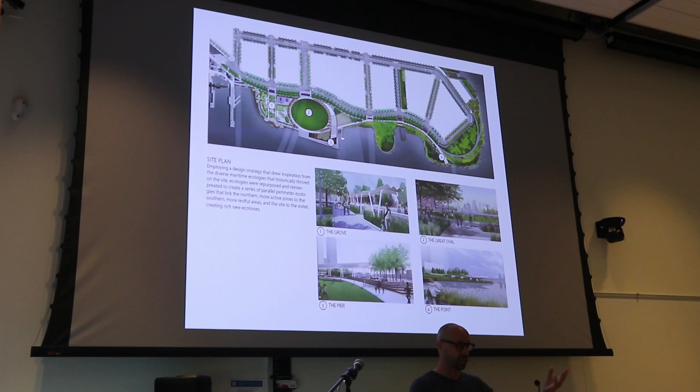Moving to the design concept of this site — it's been published 20 times over and received 50 international awards. The project is all about connection. As I mentioned, my work and the work of the teams I've been involved with has always been about connection — between landscape and the river in this case, and the communities and the park, but also about how to provide active and passive recreation, and how to connect hydrological systems with building systems, site hydrological systems with building systems, that sort of thing. These diagrams describe those kinds of connections a little bit.

Many sites accrue different levels of complexity, and this project is probably one of the more complex I've ever worked on. This diagram explains that on the northern end of the site, we were building on top of the Queens Midtown Tunnel and the most major electric transmission line that basically powers all of East Midtown Manhattan, as well as the 7 train tunnels and the Long Island Railroad tunnels — incredibly complex infrastructure. But it was also a site prone to flooding, so we were layering infrastructure on top of this.

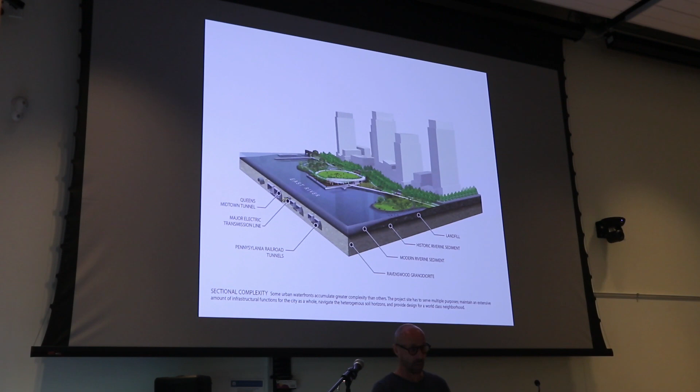On the southern end of the site, we were creating tidal wetlands, reworking the fabric in this area. There was responsiveness in how we wanted to engage the site and the dynamic nature of the tidal strait itself in terms of flooding. The East River has a tidal prism between high and low tide of about 4.5 to 5 feet every day. And then with Superstorm Sandy and events like that...

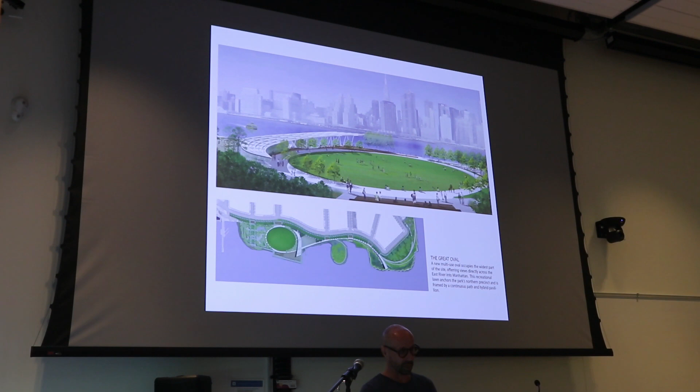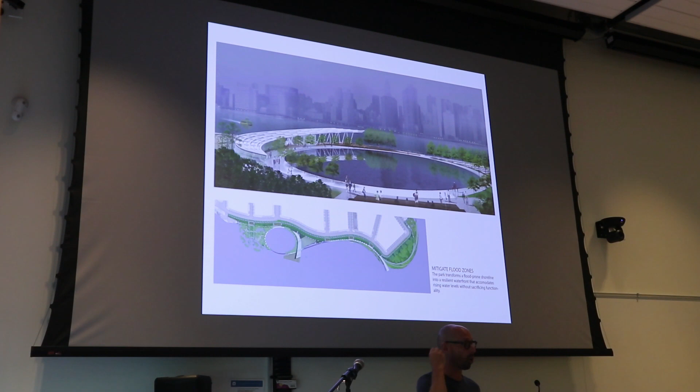Many of the parks washed out and are prone to that sort of aggressive episodic flooding. We designed this site with all of those things in mind, and it's actually one of the few sites that survived Superstorm Sandy with very little damage. The city used it as their emblem for what they were trying to achieve in their new waterfront edge design guideline program.

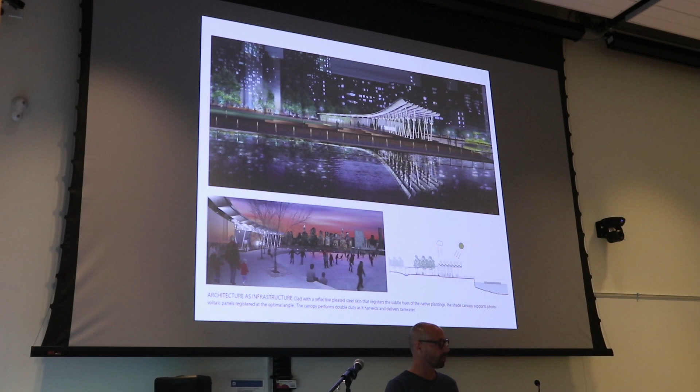But again, it's about connections. Here's a pavilion where we caught stormwater and pushed it into biofiltration swales, producing enough power through photovoltaics to power the entire park. And then, rather than flattening the site, we leveraged its topographic nature — as you can see on the lower right, it's a fill site used to create these promontories and eco-exploratory public natures, if you will.

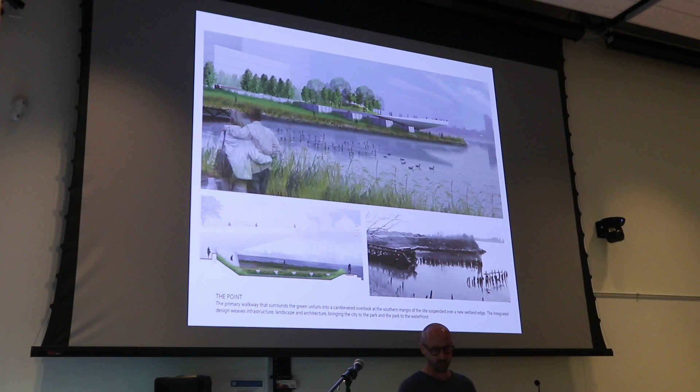Here's the final concept vision, and here's the constructed site — I'm sure you've seen this in publications. Here's a rain garden I designed and reinterpreted, and here are the wetlands. That little walkway on the edge is a breakwater to control a lot of the fetch.

The East River is fast moving, and the fetch of the wind-driven waves would just scour out a wetland. So we had to create a pervious breakwater, a promontory, so that you could take in the multiple boroughs — it's right at the nexus of Queens, Brooklyn, and Manhattan. There's an island that emerges twice a day when the wetland between the island and the upland floods.

Urban beach, and then these kind of aggregate social spaces along this pervious breakwater. The reason I'm showing you this project isn't about the pretty pictures. I'm just trying to give you a concept of what's happening here.

What really drove me insane about this was that the regulatory policy framework we were working in required us to meet certain obligations in terms of stormwater management, energy, et cetera. But it assumed that all of those standards would need to be met on day one. So if you were designing a 2-inch storm system, on day one it needed to be meeting those obligations.

So basically all of this nature-based infrastructure in the current United States has to be over-designed. By year 3, by year 5, these projects are doing 3 times, 5 times, sometimes 10 times more, delivering 10 times more environmental benefits than what would be required under a regulatory framework.

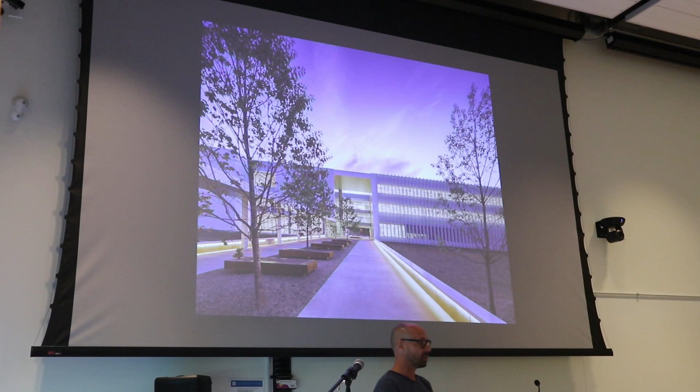Here's a project, 1,500 acres in Blackstone, Virginia, for the Department of State. This is a diplomatic security training complex. This is like where you would pull up in the middle of a forest, a national forest, and get to a gate, and you would think you would see Tom Cruise with a retinal scan. It's a very intense project—1,500 acres, drive tracks, smoke houses, rappel towers.

Here's a Class A office building. The United States trains other diplomatic security organizations from our allies from around the world. So if you're in England and you're the equivalent of diplomatic security, or Germany or France or Spain or Italy, you come here and do your training because the Americans build the craziest stuff out there. So here's an academic building. Here's a firing range. Going to Lower Manhattan, here's the redevelopment of 26 Federal Plaza landscape.

This is on a federal building in Lower Manhattan. When this project was originally envisioned, Richard Serra did the Tilted Arc across the project site maybe 40 years ago, and it was kind of unloved and widely despised by people in the building and in Lower Manhattan. Well, Lower Manhattan has changed a lot. Now it's got 3 times the volume of families and kids that it did even 10, 15 years ago. So re-envisioning this project required thinking a little bit differently about what a federal site in a really tight urban area would be.

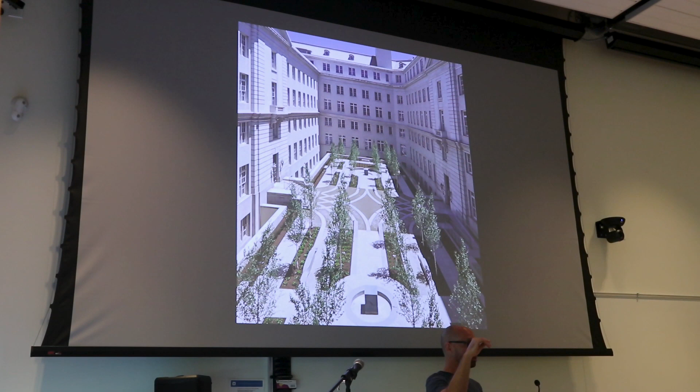This is a quick, interesting project. All of these projects, by the way, are LEED certified, site certified, all of that litany of stuff. But still, I'm going to speak to where it's falling short, and where the field is falling short, in a minute.

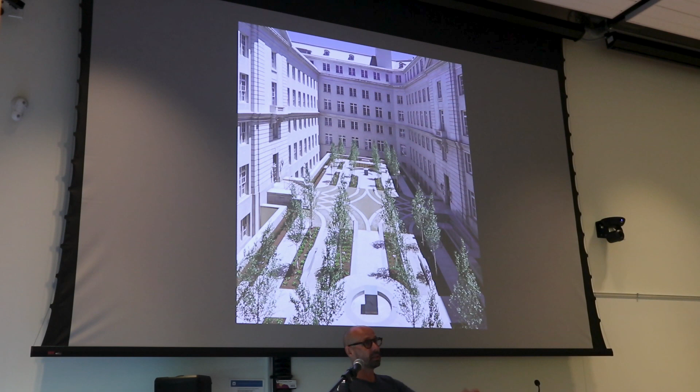This is 50 UNP, 50 United Nations Plaza in San Francisco, a 1930 Beaux-Arts building we redeveloped. It's right on San Francisco City Hall Plaza. We did a parterre garden, and this is directly after it was planted, so it looks a little like a plucked chicken, but I promise it's different now. What's really interesting is it's very formal in plan view, but when you get down on the ground plane, it's very dynamic in terms of its visual and textural quality.

So that just gives you a quick overview of some of the projects that GSA is moving and operating. But this brings me to a project I want to focus on for a second, which is the United States Coast Guard headquarters in Washington, D.C.

I think Chris Ellis maybe spoke here a year or two ago from the University of Maryland. I contracted the Landscape Architecture Foundation at the University of Maryland to basically do a deep dive on this project—like part of their case study investigation, but imagine that times 10, a much bigger set of documents, a much deeper dive.

Washington, D.C., for those of you who don't know, sits basically at the bottom of about a 120, 130-foot vertical bowl. And so all of the capital planning commissions around D.C. are very concerned about the visual impacts from any projects in Washington, D.C.

The U.S. Coast Guard headquarters is a 1.15 million square foot office building, over 11 stories, that basically descends down that topographic bowl hillside. It's the 3rd largest green roof in the world still today, about 12 or 13 acres of green roof, both intensive and extensive. All of these achievements go on and on.

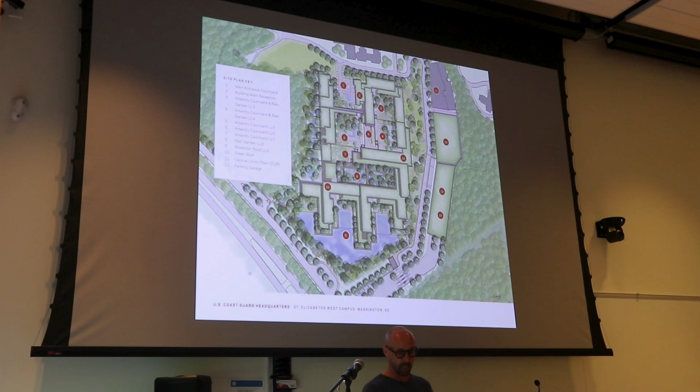But again, this project was all about hydrology, and our concerns were about dewatering this plateau at the top, moving water through the site, and basically cleaning it at the bottom. Our requirement was to treat a 1.7-inch storm, which on this particular site was somewhere in the realm of 250,000 gallons of water. So we had to do that on day one, despite us doing this Herculean piece of green infrastructure.

When we actually went back and looked at this project and started discussing where it had arrived by year 3 and year 5, not only were we processing almost 800,000 to 900,000 gallons of stormwater by year 3, but—to speak to Jack's point—we were retaining all these other co-benefits. We were sequestering almost a million pounds of carbon per year, compared to a speculative office space, which would only be about a tenth of that, about 100,000 pounds of carbon per year.

We're also seeing incredible returns on lower employee absenteeism. We were seeing higher worker productivity—this is Coast Guard itself reporting this—and greater pride. Federal agencies do these employee viewpoint surveys to tap into the morale of their staff. When they co-located in the space, their morale went up like 25 points.

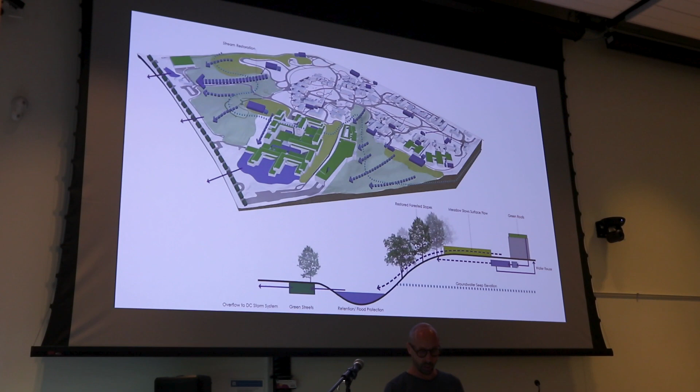I could go on about just the environmental accomplishments with this project, but again, it was emblematic of the policy goals we're trying to hit on year one. We don't have a mechanism for really capturing how nature is growing in and yielding higher performance standards and benefits.

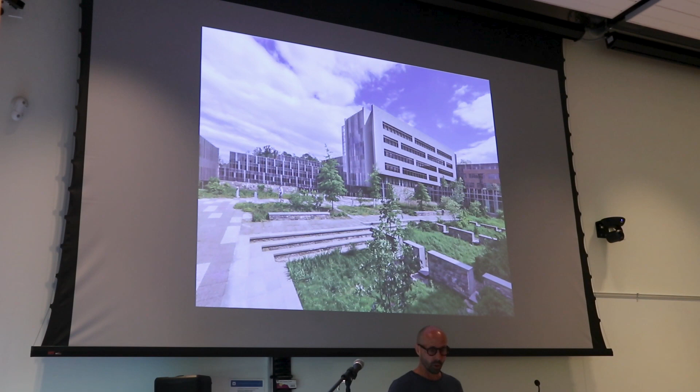Here's a pretty picture—this is captured stormwater. There are very mannered stormwater details like this, with skim fountains and the like. Here's some descending courtyards with water features, all recirculated water. Major green roof areas, huge stormwater catchment areas with weirs and check dams.

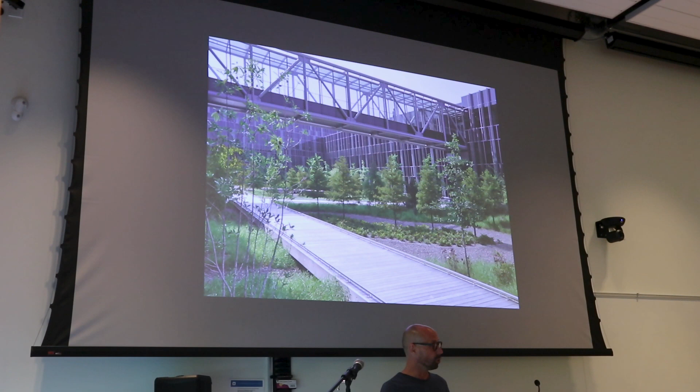There are areas that are just massive, allowed to just be vernal pools. And they are—when you go there, I've seen bald eagles just sitting in trees. Deer will walk right onto the roofs with no sense that they're standing on a piece of architecture. There is a complete meshing of landscape and architecture on this site.

This is the catchment, the metaphorical Chesapeake Bay. At the top, the landscape system is designed to be more like a montane, West Virginian landscape, and it recharges the site.

The next project is the one that probably lit my hair on fire the most, in terms of saying we have to do something about this. Here's a land port of entry in Arizona, the Nogales Land Port of Entry. It's the fourth busiest land port of entry in the United States on the southern border.

As part of the American Recovery and Reinvestment Act, we developed this port. I think Joe Volpe used to say this, or maybe it was Ken Smith—one of the two of them used to say we need to have a good concept here, otherwise this thing's going to turn to dog meat by the end of the process. So every project needs a good concept, otherwise you won't have a North Star for where it's going.

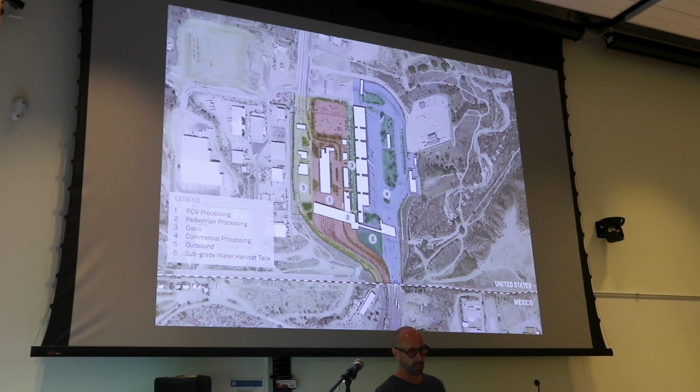This project, I'm going to show you a quick 5-minute video to break up my talking, but the project is all about water, as you can imagine. The result is a much different design expression, both environmentally and visually, texturally. You can see how lush this pedestrian area is versus what I'm about to show you in the video.

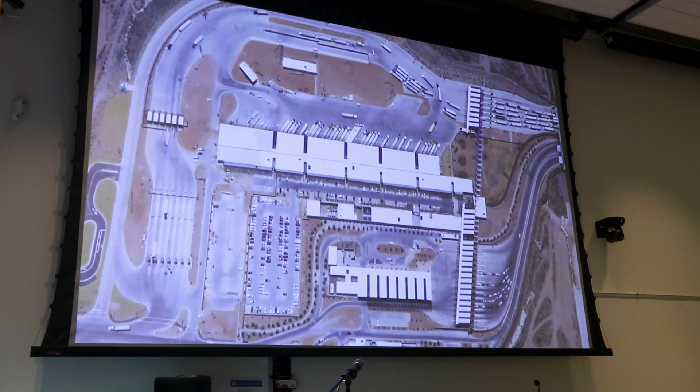An oasis conjures many romantic thoughts: Bedouins lounging by a life-giving pool of water in the middle of the Sahara, Native Americans locating sources of water to irrigate crops newly sown in the Sonoran Desert. An oasis provides a respite from the environment, a dignified and comfortable place for the trade of goods and stories. The new Mariposa Land Port of Entry is this respite. It is also a complex lightning rod of a project, sitting on one of the most contentious borders in the Americas, at the eye of a whirlwind of debate over liberty, migration, and trade.

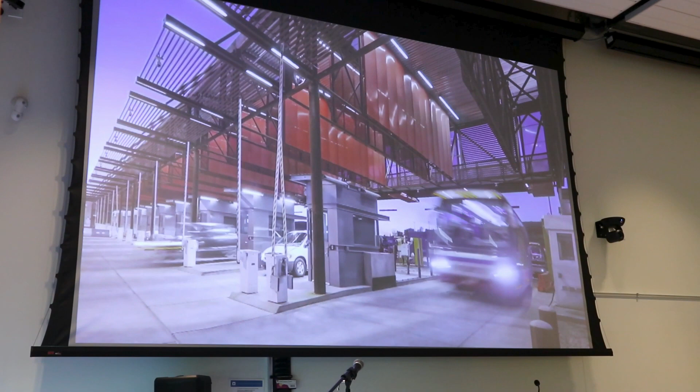Located just west of Nogales in southern Arizona, this 55-acre, 270,000 square foot project strikes an impressive balance between security and a dignified welcome, between efficient operations and a comfortable environment for staff, and achieves sustainability within a harsh and unforgiving desert climate. At a basic level, this region is defined by a geopolitical line on the earth that divides the American dream from human beings in need. Many, in attempts to navigate this line, risk their lives. In his poem Borderlines, Arizona's 2014 Poet Laureate Alberto Rios clearly sees the border as what joins us, not what separates.

Inspired by this clarity of thought, the design of this port of entry aspires to reach out with grace and authenticity to our southern neighbors and say welcome.

Inextricably a product of both the General Services Administration's Design Excellence Program and the American Recovery and Reinvestment Act, this new port of entry demonstrates responsiveness to local traditions and expression of culture, placing great value on a sense of dignity, elegance, and strength.

Designed as a cultural connection rather than a division, the threshold of the new port is an entry pavilion inspired by the waving red, white, and blue flag. Additionally, this major reinvention of the fourth busiest port in the U.S.

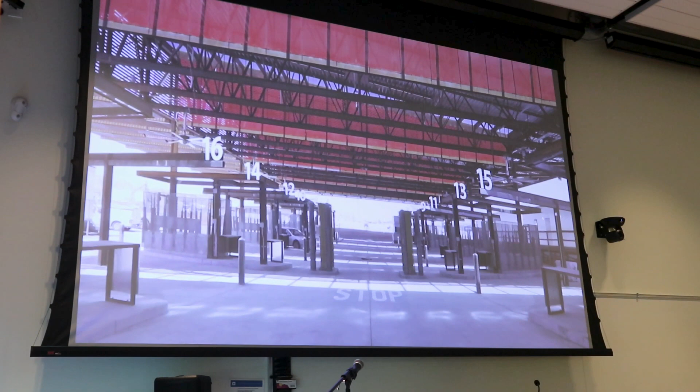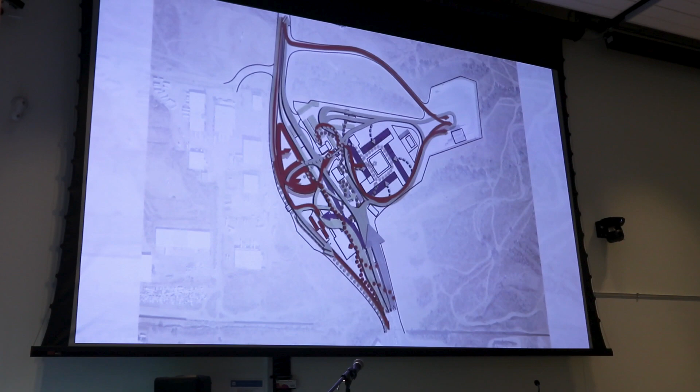and Arizona's largest commercial port is on track for LEED Gold. Traffic flows and internal circulation is a key element to the success of a port. Diagramming the existing operations exposed extreme deficiencies and emphasized that a clear and efficient pattern of movement was critical.

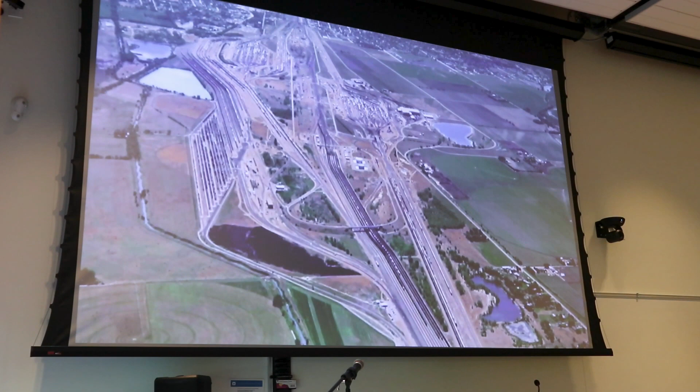The solution to the chaos was found in the clarity of a railroad yard design: smooth, continuous paths, optimized movement. To complement this planning strategy, the idea of a desert oasis, a life-giving source of water in the middle of a harsh climate, was implemented.

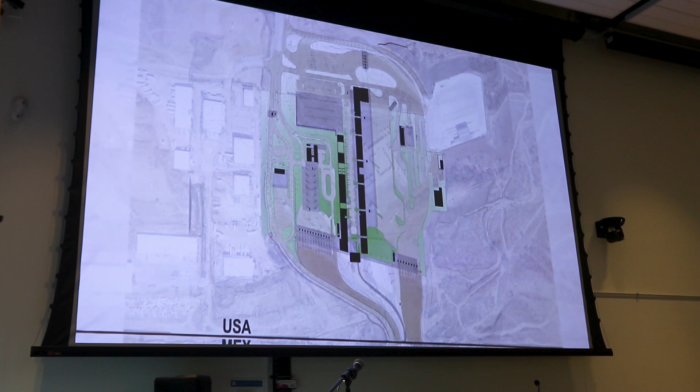Mariposa is designed around the concept of creating an oasis within a bustling vehicle and pedestrian processing station. The intent of this idea is to infuse the human experience, both for visitors and staff, with a connection to nature, and thus some dignity and relief from daily stress.

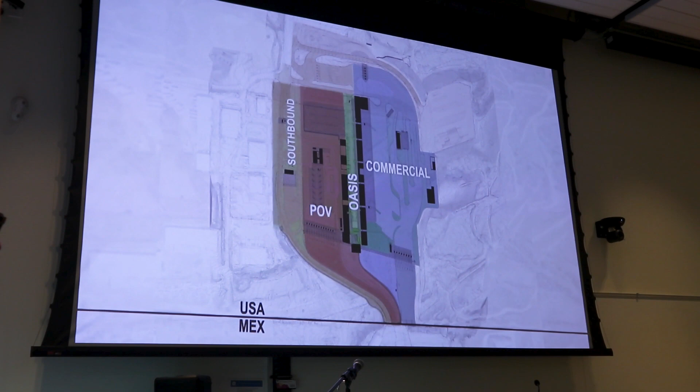The clear zoning of the site emphasizes smooth traffic movement around the centrally located oasis. The vitality of the port comes from its handling of water, a critical element in the desert.

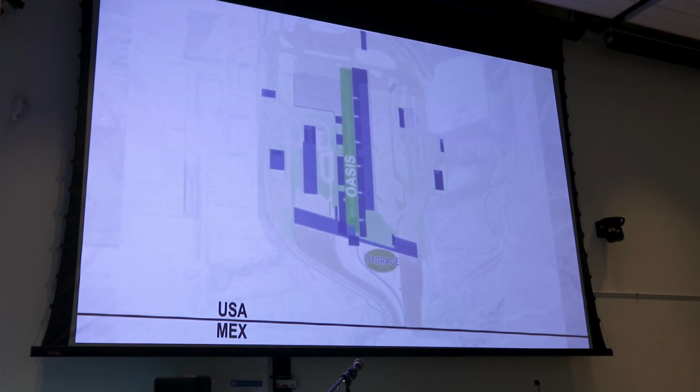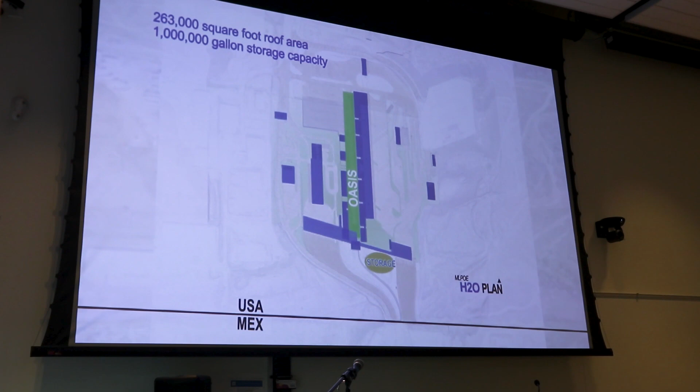Nogales is characterized by massive rainfalls during the monsoon season, paired against many months devoid of precipitation. The pavement and roofs throughout the port's campus are carefully designed to harvest this rainwater. In a typical year, the project will be net zero water for irrigation.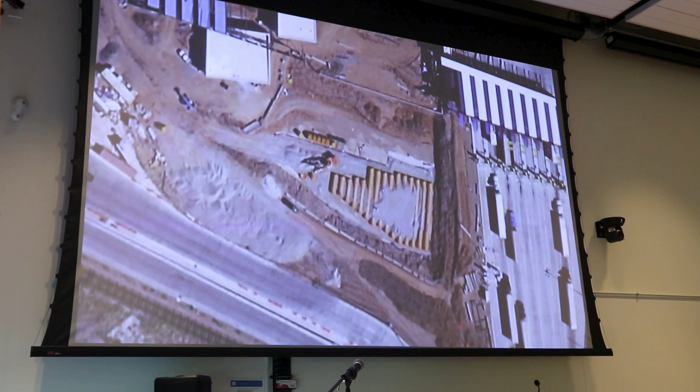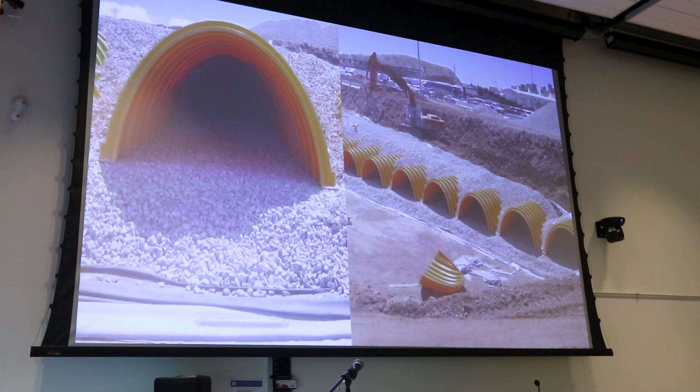From April through June, there is a calculated shortage of 746,000 gallons. To accommodate this shortage, a rainwater harvesting storage system of 1 million gallons was designed to allow for prolonged periods of drought. In August of 2013, monsoon rains maximized the storage capacity in only two weeks.

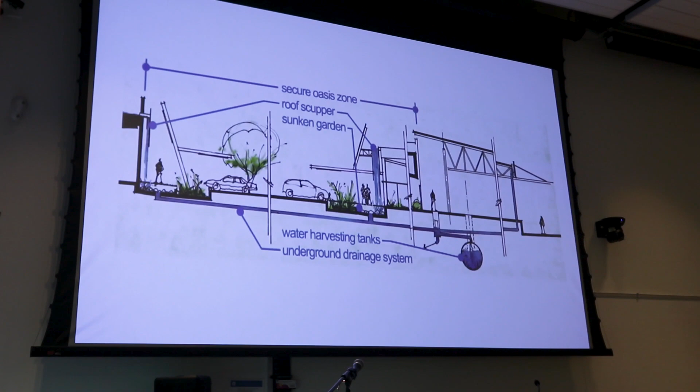The oasis respite and the celebration of rainfall in the desert work in tandem with a clear and secure planning diagram to create a more humane experience.

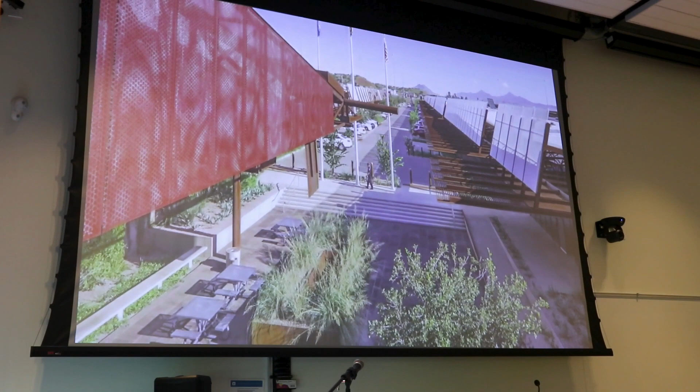The buildings and exterior spaces are designed to enhance the staff's and users' operations through program, flow, natural daylighting, views of nature, thermal comfort, safety, color, and water harvesting.

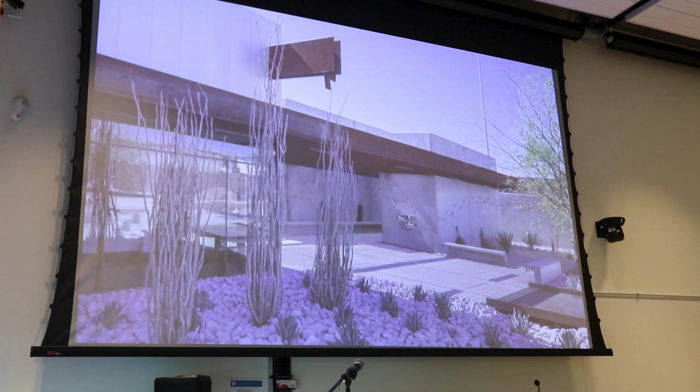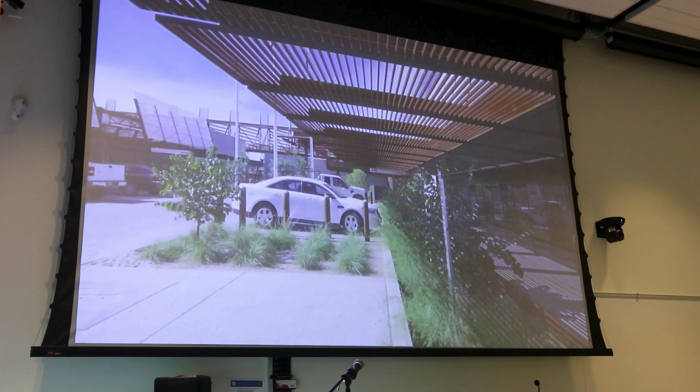Pervious paving, sunken gardens, and sculptural scuppers are integrally designed throughout the site and buildings. Shade trellises and vegetation work together in the oasis to provide a comfortable, safe zone for officers and staff.

Many design iterations of scuppers and catchment devices were studied. Because water is precious in the desert, the scupper and downspout system is an opportunity to celebrate a rain event.

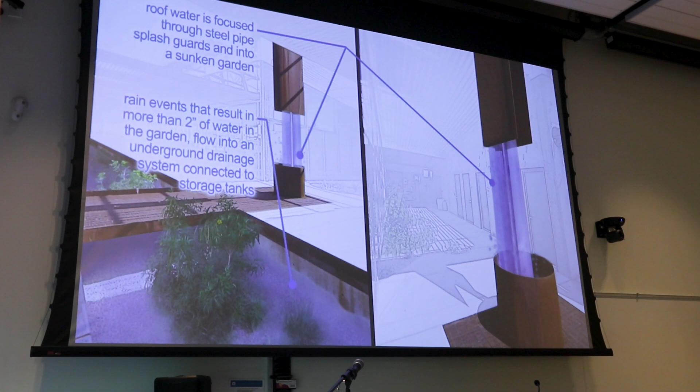Roof water is focused through steel pipe splash guards and into a sunken garden below. When a rain event results in more than 2 inches of water in the garden, it overflows into an underground drainage system, which is connected to the water harvesting storage tanks.

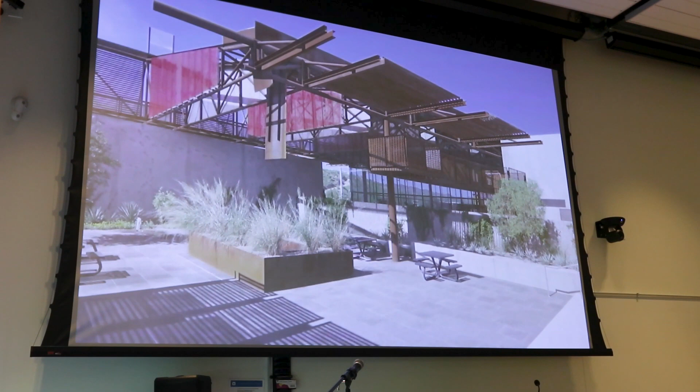The focal point of the oasis is the pedestrian plaza. At the center of the plaza is a dramatic scupper and catchment basin. The crash plate of the scupper focuses all water from the 26,000 square foot canopy roof into the collection basin. This basin connects directly to the underground drainage system and water harvesting storage tanks.

At the Oasis Plaza, a bioremediation fountain helps filter harvested water, while providing an intimate space for private reflection filled with the calm and soothing sounds of water.

The Mariposa Land Port of Entry is a study in transformation. Before, there was a dangerous mix of vehicular and pedestrian traffic arriving in the United States via what is essentially a parking lot. The new arrival experience demonstrates how, through careful planning and thoughtful water harvesting design, a beautiful and vital landscape can be sustained, one that embodies the best aspirations of the United States.

Okay, so we did a deep dive on this project as well, post-construction, and everything you saw in there is largely accurate, except it was constructed with major errors. There were errors with controllers, hydrological controllers bringing chiller water to the site, water into the chillers. There were problems with how this 1 million gallon cistern was constructed. And these are the things that clients don't want to put out there and celebrate, but they're the reality, the gap between prescriptive performance and what is actually happening in the field, right?

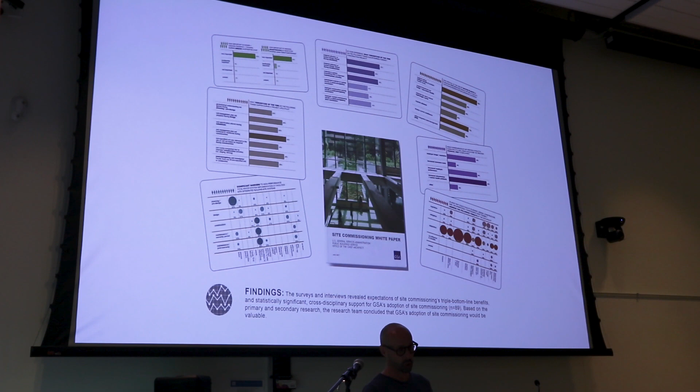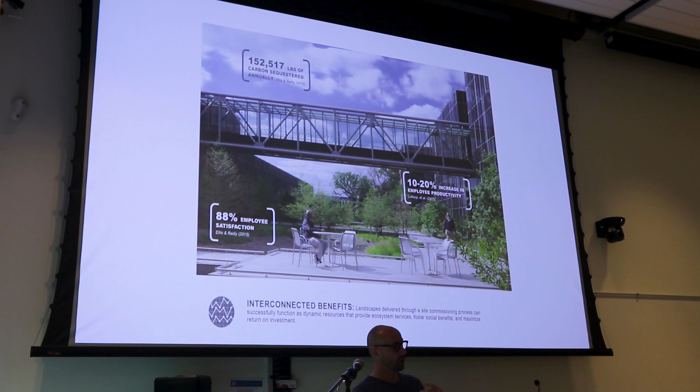And it gets at interconnected benefits. It gets at the process. It gets at what you're yielding as a result of implementing a commissioning process.

What you're avoiding in terms of cost avoidance, which obviously people that are funding major projects and portfolios or groups of projects are interested in the numbers game. A lot of the folks, as you would imagine on Capitol Hill, are really only interested in numbers. So you have to be able to make that argument if you want to change policy.

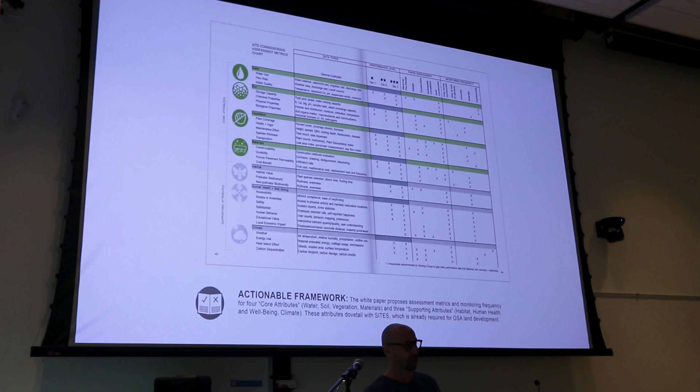Well, that's really fallen away from a lot of major builders. A lot of major builders have moved into integrated project delivery, construction managers as contractors, design-build, bridging, design-build. And so what does that mean? There are all different ways projects go from planning to a real project on the street.

This is just an update to something that I think I first really understood in Jack Ahern's course, which was really about adaptive feedback, right? And how do you learn from your process? The federal government wants to say we're special, we have unique requirements, and they do.

I mean, quite honestly, the federal government is building things that other private entities are not building—land ports of entry, laboratories for NASA and the like. So that's why I had to build this kind of database for the feds, because they need to know that this is uniquely positioned for them.

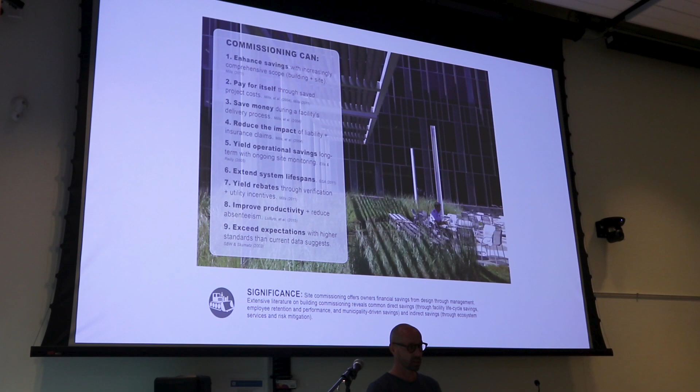And it's about what commissioning can do, right? That it can tap into rebates, that we can speak to the broad spectrum of users, both public and private, that we have higher user satisfaction, we have less change orders in construction, that we're able to access rebates from utilities, all of those sorts of things.

How do you take a framework to a federal scale? You have to pilot it on projects, right? So we identified a few projects once this was done that we were going to pilot commissioning in. And then we're in that phase. I'm no longer with GSA—they are currently in that phase. I tapped out, and now they're in the pilot phase.

Next phase is federal rollout, and at that point you're kind of changing the industry. There's a lot of folks interested in this at this point. But one of the last pieces I left was developing these micro reports on how you actually apply this in a federal capital construction model.

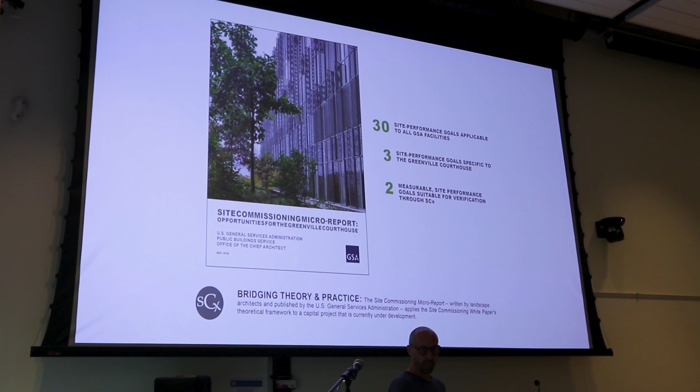Here's a federal project in Greenville, Mississippi, in the Delta. It's currently under construction. This is literally a town away from where Robert Johnson sold his soul to the devil, but it's a phenomenally cool place, very aqueous, very hydrologically interesting. The project is about 300 feet from the Mississippi River—there's flooding, there's levee, there's sand boils, all these really interesting phenomena.

So we thought, hey, why not pick a really challenging project that we can lay this commissioning concept over the top of? This is the design, the architectural design of the project, the entry.

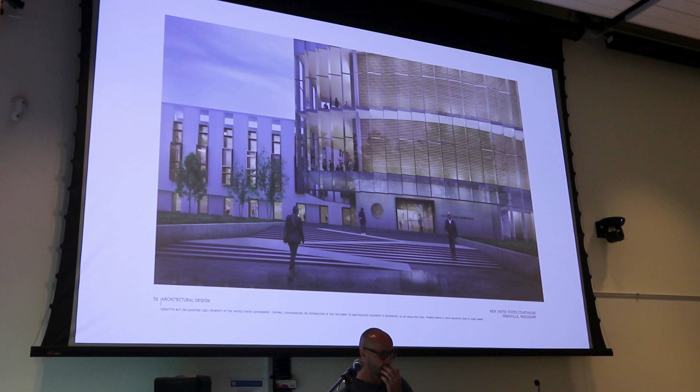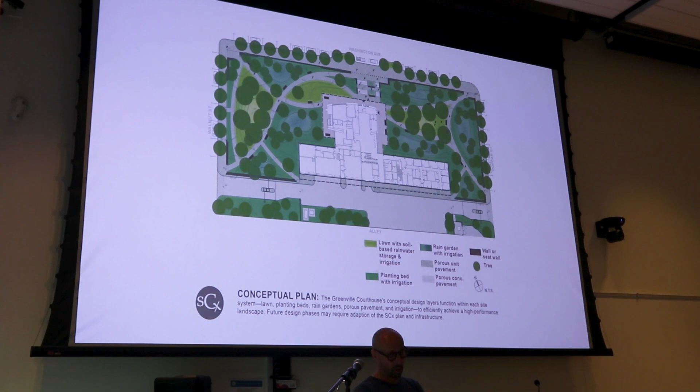But when you look at the actual site design, there are different elements—force protection elements on the perimeter, but within the landscape there are standard lawn areas, planting beds, and rain gardens, and systems that move from the site out into the building and from the building out to the site.

So the heliostats on the roof work to shine direct light into gardens. It's where photovoltaic panels are channeling energy. It's where we can see every courtroom in this building and how much energy is being drawn on it. So basically it's this nerve system.

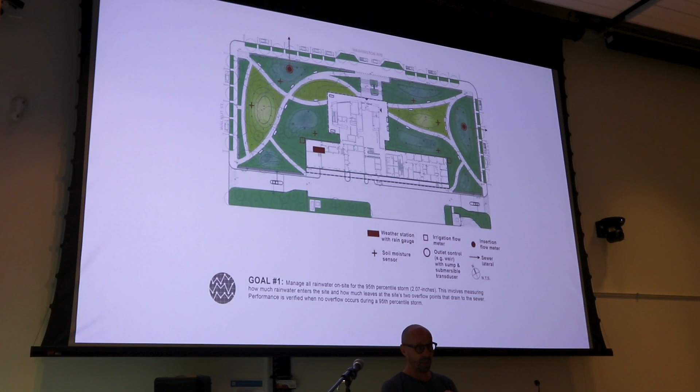So we attached a weather station to this nerve system, put flow meters out into the landscape at the sewer laterals as well as the irrigation controllers, and added flow meters in the site plumbing and soil moisture sensors to start creating this feedback loop, where the water we were catching was able to be used to process water and vice versa.

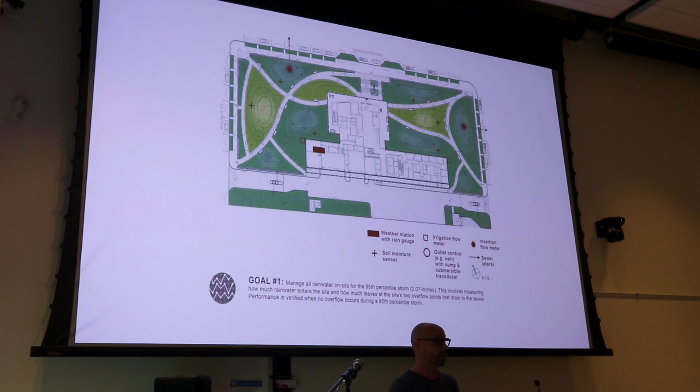And there was a degree of precision brought to this that currently just isn't in the field—the instrumentation is lacking, basically. So this project is currently in construction.

I'm sure with that commissioning framework, at the program of requirements level you're setting the performance into the contract budget. When the design team walks in the room, they're already inheriting the performance requirements of the project—they're not asking what they are at that point. They already have clarity and understanding of what they are.

The commissioning agent, a third party, understands what they're responsible for doing during all of the design and integrated project delivery meetings, so that everyone has a stake in this and a working understanding.

Here on the screen you're seeing some of the design documentation—probably the first time I've ever seen this brought together between landscape architect and building engineer, extending spatial models and energy spatial models out into the site to consider thermal performance of landscape features, the critical elements of project turnover, and baking all of that into the process.

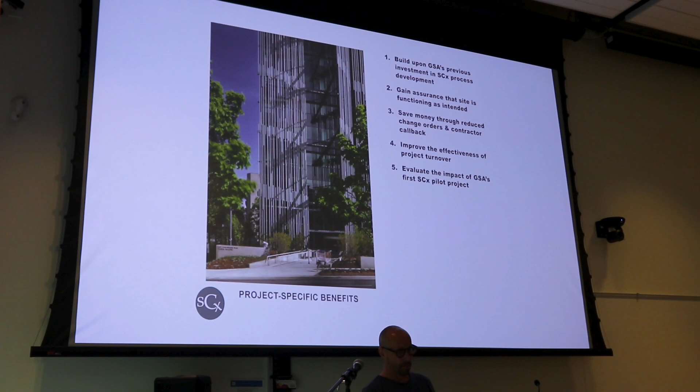And this is just kind of a project-specific benefit, but with that, that's evolutionary infrastructure.